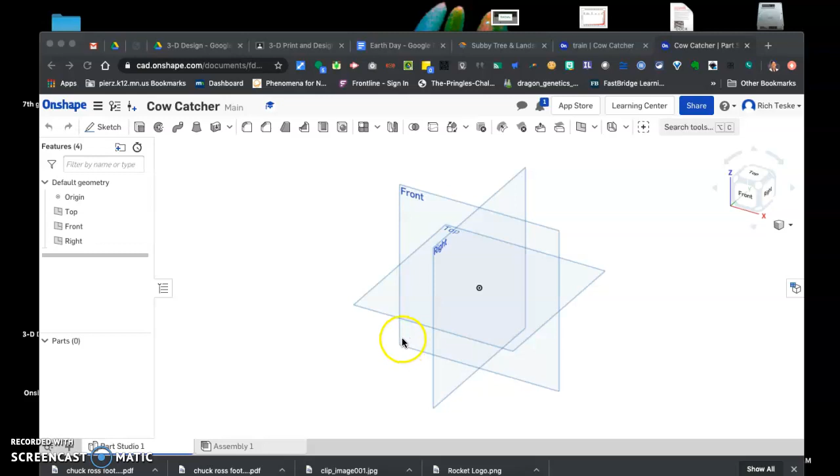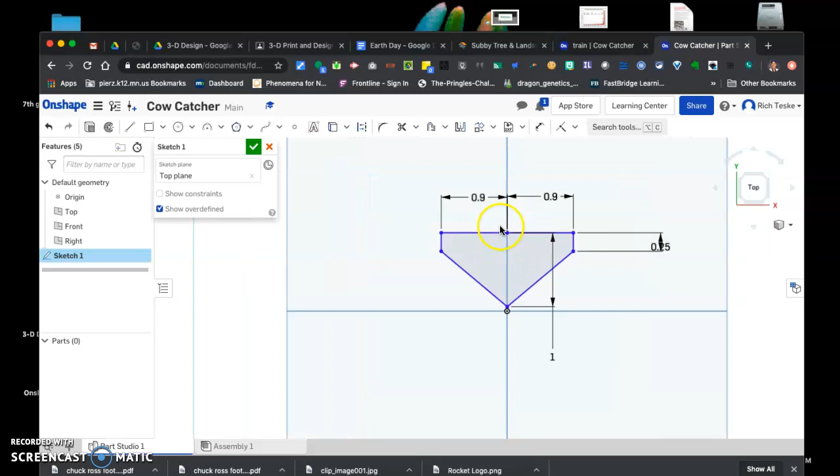First, the sketch - I'm going to paste because I did these in another one. I'll leave these up for a second. You can see I went from the middle, 0.9, 0.9, so that'd be 1.8. Over here is 0.25, and then from there to there is 1. So then I finish it, and that's what I have. The next thing I have to do is move a plane.

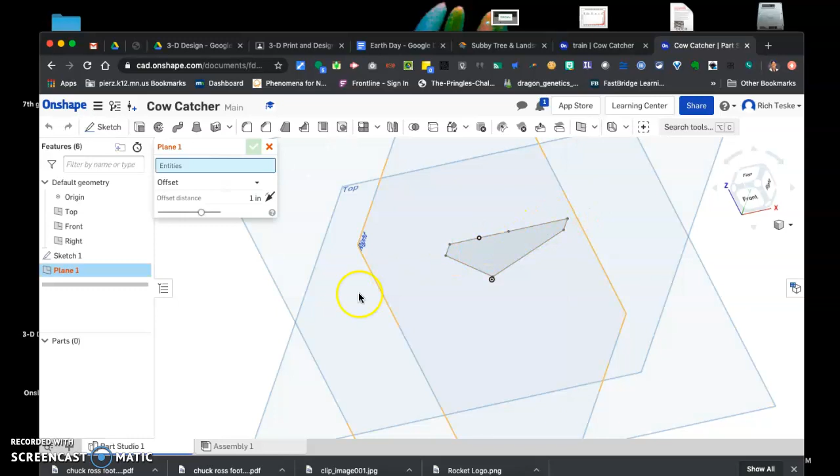I go up here and click plane. And of course, what plane am I going to move? I'm going to move that one, and I believe 0.75 - please double check all these, I'm pretty sure I'm right but just to make sure. So you can see now I have a separate plane there.

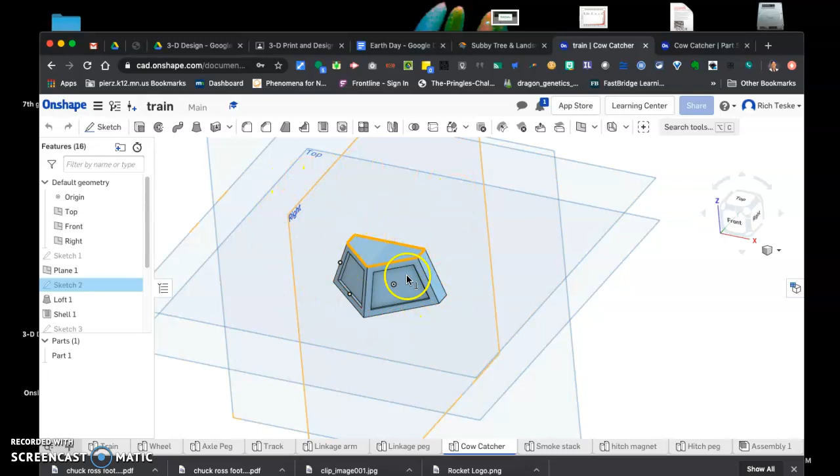I'm going to go over here. This is one that I've done - I've done like 4 of them now, so it's a little easier, a little quicker, you don't have to watch me do it. Now I'm going to sketch here, and I'm just pasting it - of course you'll have to draw them out, which isn't very hard. I'll go through those dimensions here in a second.

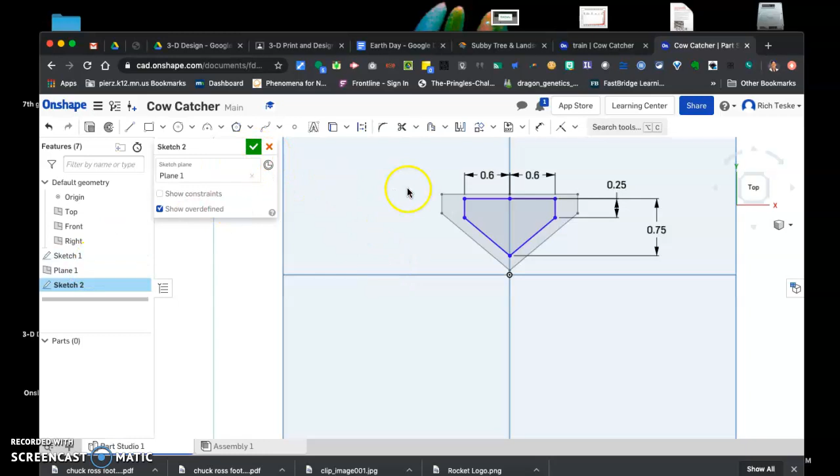You can see here, 0.6, 0.6, so 1.2 all the way across, 0.25 down. It's going to be exactly the same as that, and then 0.75, and where it's positioned, there you go. Now, however you want to position that - for example how I did it there, whoops, make sure I'm on the right plane again here.

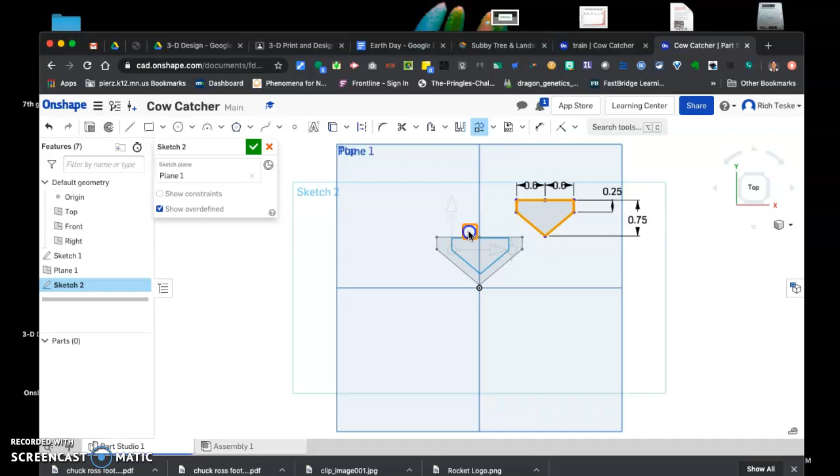Where does this go? How does the cow catcher work? So you line that up, and I'm going to make mine even - I believe that's how they have it on there, if I remember right. And there we go.

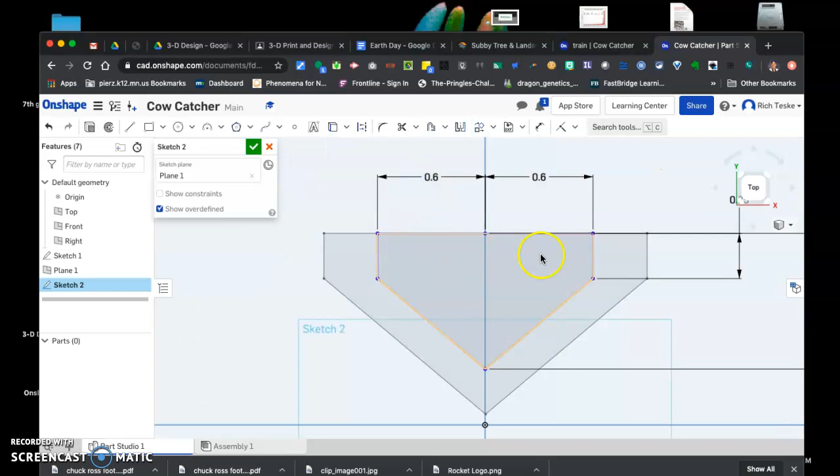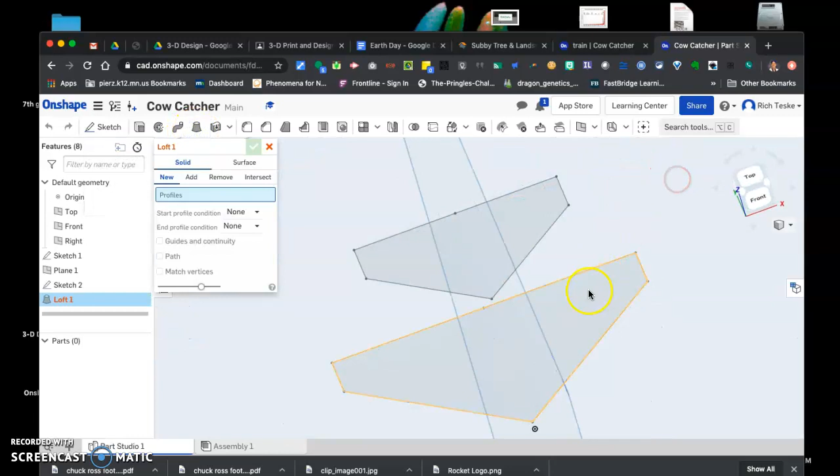Once I get that - oops, that's my phone - I'm just going to click finish. Now you can see here we have 2 separate planes. We're going to use this feature here - I saw people do this a lot of different ways, but this works really well. We're just going to use the loft feature. If you click that, and where do you want to loft it - that one. And there it is. Okay, then I'm going to finish it.

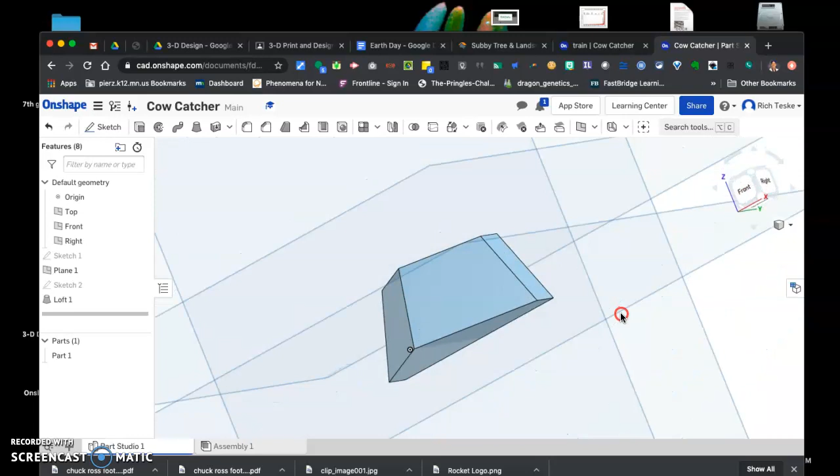Now I saw someone take it and build it out of a chunk of block and then eliminate everything away - trust me, this is easier. Once you're done with it and you look at it, the first thing I would do is go right here to shell, just click it, and then it's shelled out, and that's part of what you have to do. Once you shell it, there you go, you're finished.

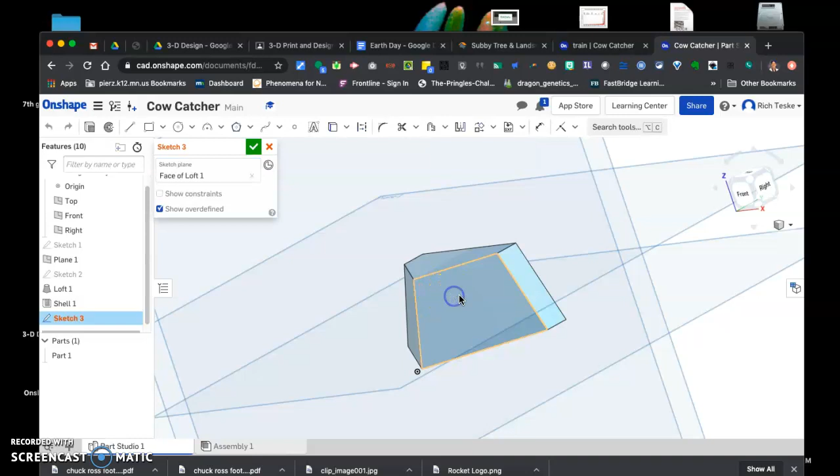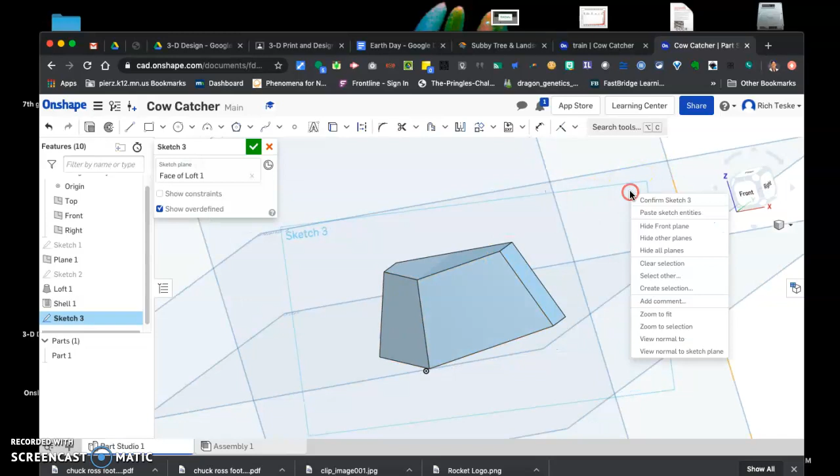Okay, now comes each part here. So I'm going to sketch on here - now I'm going to rough draw this. Actually, I will pull it from the other one that I did. Sorry. And I just make sure I get the right dimension so I can see what I'm doing here. Now you can correct these.

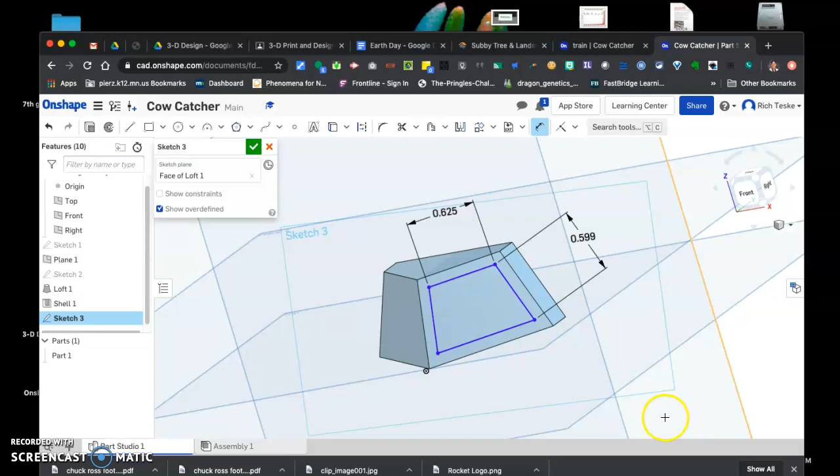What I did before - I'll show you 2 ways you can do it. There are moves. If you want to see my dimensions, I'll do them up quick here, and I'll show you how I came to be. So those are the dimensions. Do they have to be exactly like that? No, they just have to be on that part of it, okay? So once you know that, you can do that.

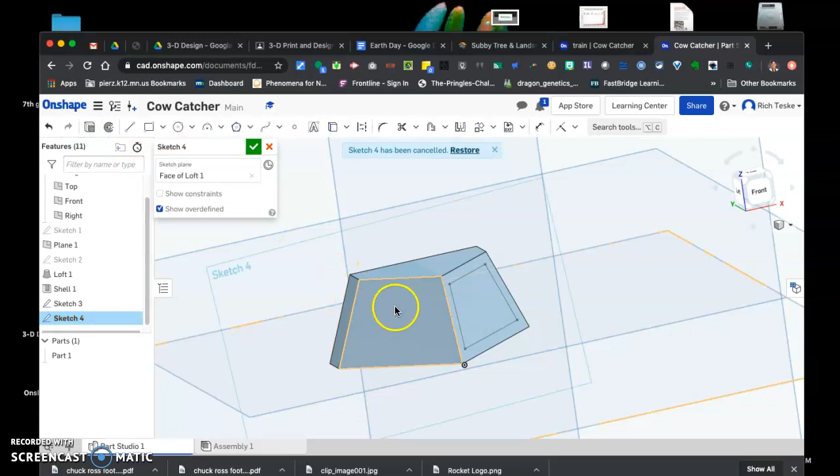We're going to sketch one on this side, and all I'm going to do here is click offset. If you click offset, you don't have to do what I just did - you can just click on the outside. I'll show you that again - as I'm drawing here, there it is on that sketch. I go right here, oops, click on there, right here, and offset. What do I want to pick? I want to offset that feature, and you can see it draws it larger, or for my sake, smaller.

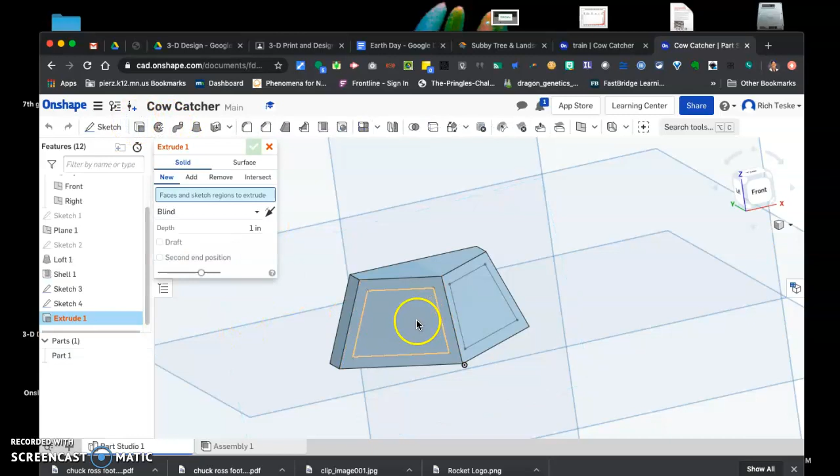Now these aren't going to be exactly the same, I just want to show you how I do that. So there's those. Now I'm going to extrude them - I might try to do both at the same time. Sometimes you see it runs into a weird thing like that, so let's eliminate that one for now. Okay, so I have that one.

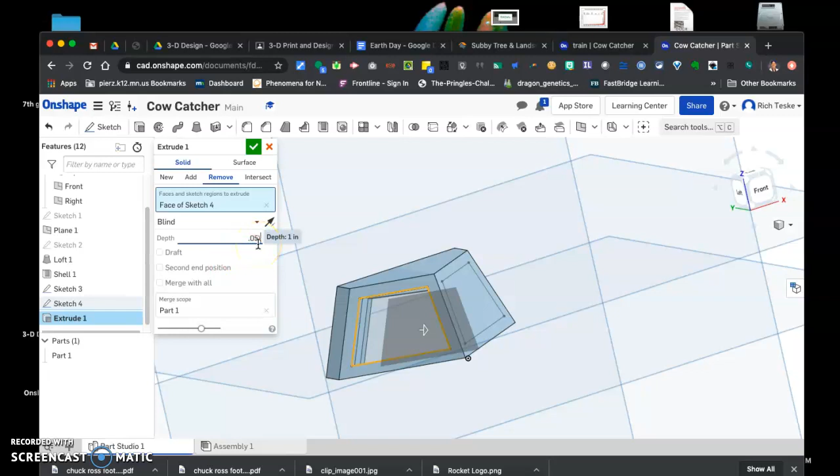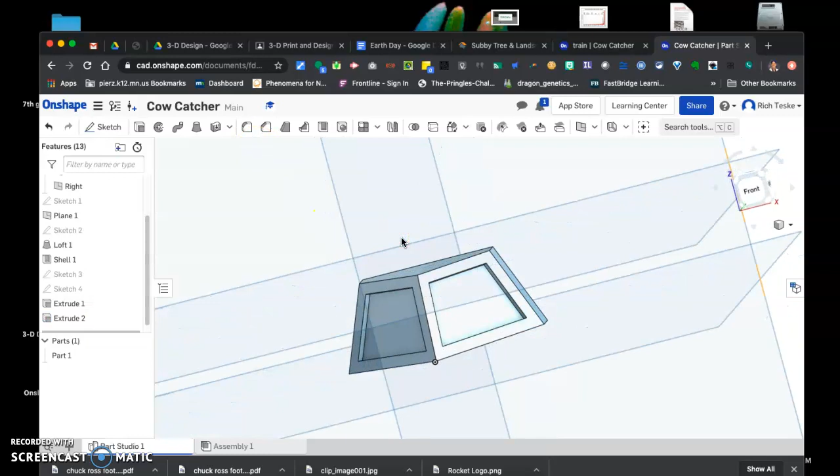I'm going to click remove - 0.05 I think will get me there. And that one looks good. Did it go all the way through? Nope, good. And this one, remove, 0.05 - sometimes you might have to change the second one a little bit, but this one looks like it works. And there's that - so there's my two parts right there.

Of course, on the back are just your 3 holes that you're going to draw - I'm not going to show you how to do that, I think everyone knows how. So there is your cow catcher.